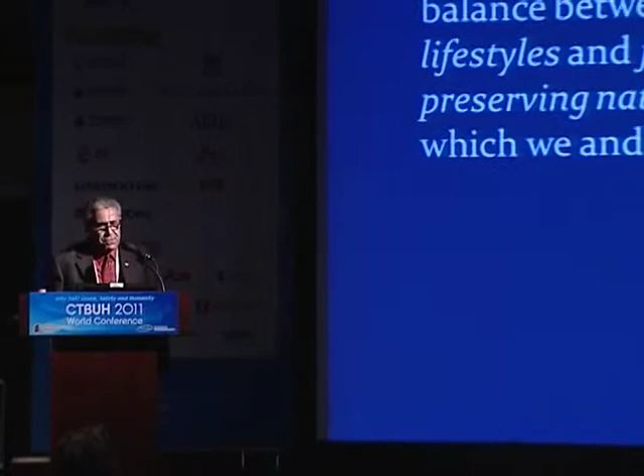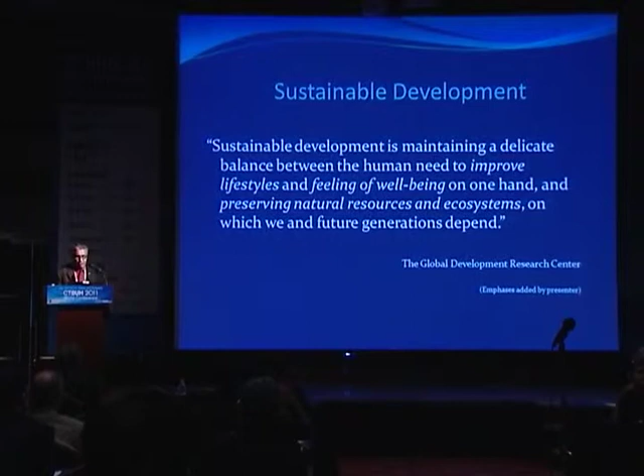We've all seen different definitions of what sustainability is. Just a couple of phrases I'd like to emphasize that you see in this particular version of what sustainable development is: it talks about improving lifestyle, so we're not talking about sacrificing quality of life, feeling of well-being, and it also talks about preserving our natural resources and ecosystems. Those are all terminologies we're very familiar with.

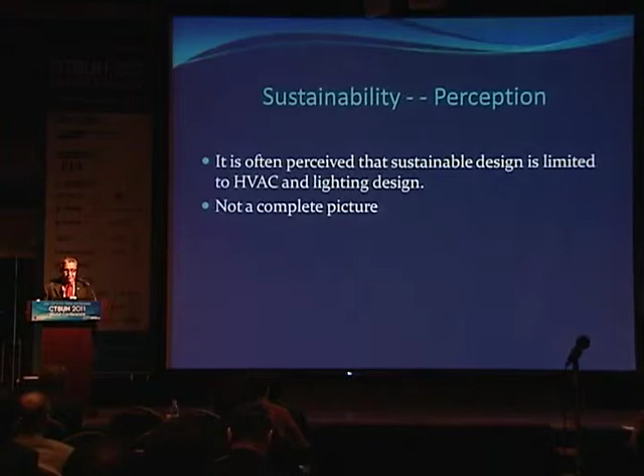One of the perceptions that exists among many people, certainly the public, is that when we talk about sustainable buildings, we're talking about efficient HVAC systems, maybe going a little further, including lighting and perhaps even the curtain wall. Obviously, this does not give a complete picture of what sustainable buildings are or what sustainability is all about.

As far as tall buildings are concerned, there are a number of features or characteristics that affect the sustainability impact of the building: architectural design, structural design, MEP design, construction, building operation, urban issues, and deconstruction. Some of these are more obvious than others. I'm not going to talk about MEP because we've all heard about that in many different presentations, and that's probably one aspect of sustainability that a lot of people can relate to more directly.

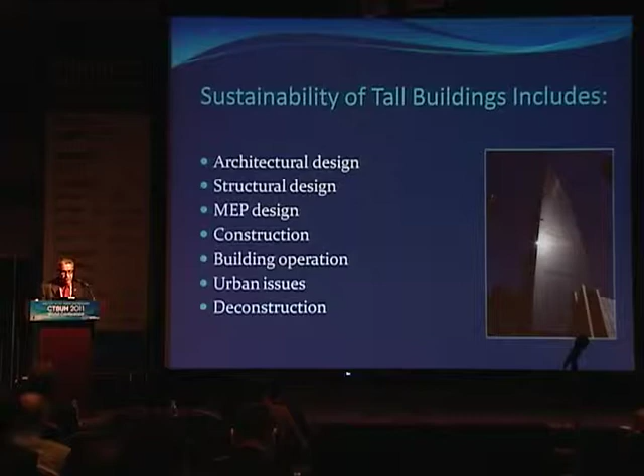I do want to point out building operation. We don't design and build buildings just for the sake of having designed and built a building. The purpose is for the building to go into operation and serve its purpose in a very economical and efficient way. So operation is very, very key in my view in terms of when we talk about sustainability. I'll talk about some of these other specific items a little bit more later on.

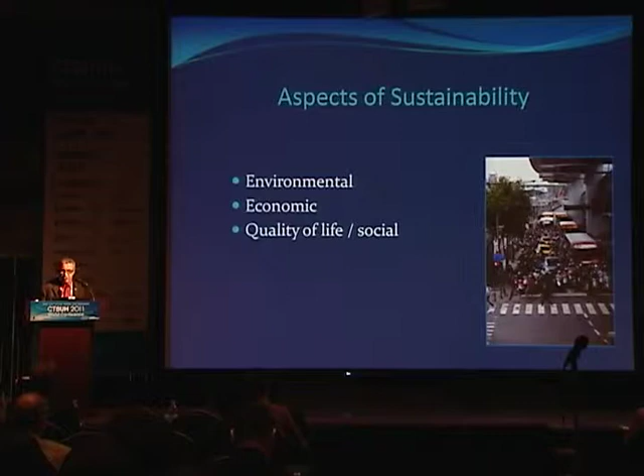Three aspects of sustainability that oftentimes you read in the literature: one is environmental aspect, one is economic, and also quality of life. The reason I mention these is because this would hopefully help us put things in a little bit better perspective when we talk about some of the other issues that will come up in a few moments.

How do we measure sustainability right now? Well, the most common methods we use are things like energy consumption. We find out how much energy a building consumes per square foot, per unit time, whatever that time period is, and we oftentimes compare that to other buildings, saying this building is more or less efficient than another. We also talk about material use, partly because of the limited resources we have, and also because of the embodied energy and carbon content. And of course, sometimes people go beyond that and also look at life cycle assessment, which is very appropriate in terms of looking at sustainability.

Those are all very good measures. They're very appropriate. If we were to evaluate the effectiveness of a design, we need to have some measuring sticks so that we can measure them. Those are all very appropriate, but perhaps not very complete. We do also have organizations in the US and other countries that help us, or whatever you want to call it, rank buildings in terms of their sustainability qualities.

They have certain criteria. I personally tend to not agree with some of their criteria, and I hope some of you don't either. This is one particular subject I can talk about a lot. But we do need measuring sticks so we can compare. On the other hand, I think the criteria needs to be more refined and appropriate. We've also seen some organizations significantly changing their criteria, which indicates that perhaps the criteria we were using before were not quite on track, and suddenly there's a big change.

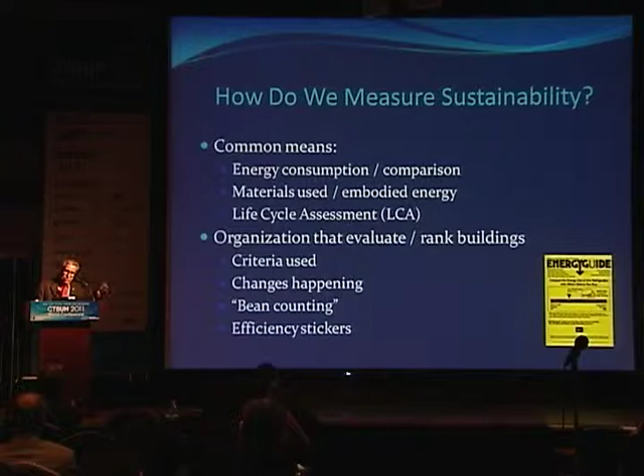There are also discussions in some countries about having, similar to what you see on appliances, energy guide stickers that say how effective a building is. Again, those measures may be accurate within a certain context, but they should not be viewed as an overall appropriate evaluation of a building.

Let me talk a little about the characteristics of tall buildings so we put things in better perspective. There is a high level of expertise and skill that goes into the development and design of tall buildings. Not everybody designs and builds tall buildings. You have to be highly skilled, highly knowledgeable, very experienced, and know what you're talking about. At this conference we've heard from many highly regarded professionals who've designed and built tall buildings, very skilled people. What that means is you get buildings that are very efficient, very well designed, and often apply the state-of-the-art in whatever field.

Tall buildings are also very safe, as opposed to what some people feel. Unfortunately, when there's an incident like 9/11, people start questioning the safety of these buildings. In fact, in my view, tall buildings are excellent shelters for certain situations. Imagine certain natural disasters that cannot be predicted, such as earthquakes, but with winds, typhoons, and tsunamis, tall buildings may serve as shelters. There may be water damage, but the buildings will certainly serve as very appropriate shelters.

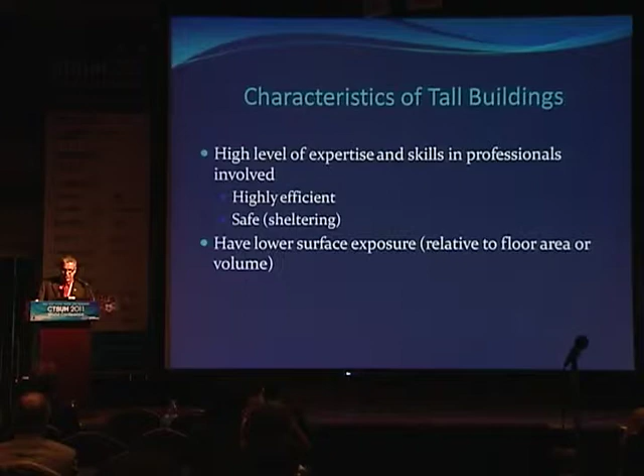Tall buildings also have lower surface exposure, whether you look at it in terms of surface-to-floor-area or volume, which means they have higher qualities in terms of energy efficiency, strictly speaking.

Other characteristics of tall buildings relate to urban issues. Tall buildings are very effective in terms of using land and developing high-density populations. They are tremendously helpful for more efficient infrastructure. Imagine, for example, if a building has 500 residential units, and those units were instead built in the suburbs - it takes up a lot of land and requires significant infrastructure to deliver utilities like water, electricity, gas, and sewage. That significant requirement will certainly affect the sustainability of the entire community.

That's why I said tall buildings have sustainability impacts that are very important. Imagine all those people who would otherwise live in the suburbs, commuting back and forth to work every day.

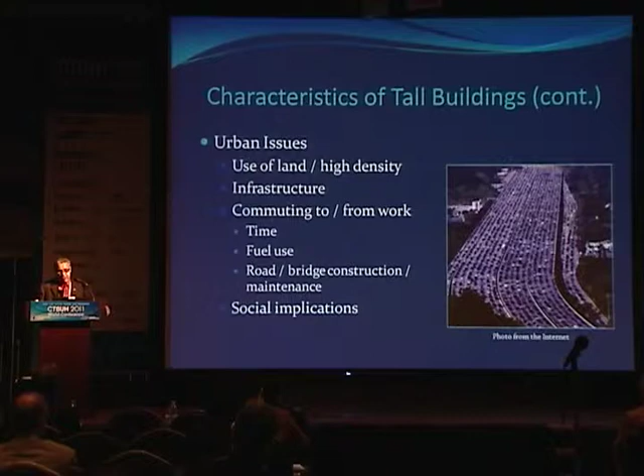They spend a lot of time on roads. There's a lot of fuel consumption. There's a lot of erosion of roads and bridges that need to be replaced or maintained. Again, those are all impacts on sustainability that tall buildings could address.

And there are, of course, some social implications. I'll come back to this a little bit later on. Other characteristics of tall buildings, again, some of these could be viewed as positive or not so positive, but I want to share these points so we can come back and draw some conclusions.

Certainly, tall buildings consume more material to build, mostly structural material. There is a premium for height. We all know that, and until we find a situation where we can stop wind and prevent earthquakes, we're going to have to pay a premium for design of tall buildings in terms of structure and material use.

Also, they have a high ratio of translucent to wall area. That's part of their architecture. It's very appropriate in my view. But that means there will be more daylighting, beautiful, spectacular views, but there also may tend to be more energy, heat gain and heat loss, which may be the other side of the equation.

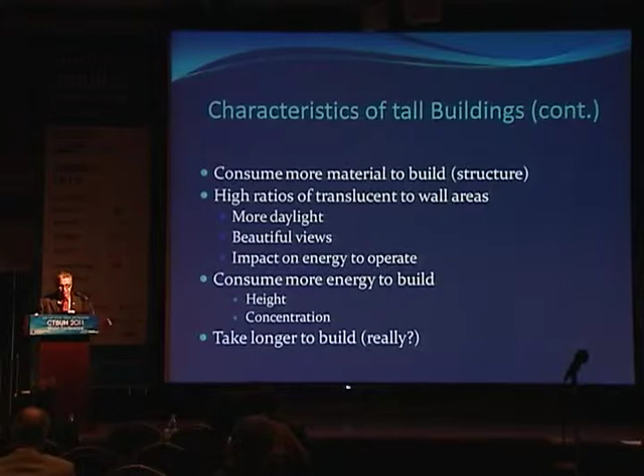They consume more energy to build because of the height, because of the concentration of delivering material to high heights. To build buildings that are spread on the ground is one thing, but to concentrate all of that in one small area requires a different level of energy. And of course, they take longer to build because of the reasons that I just mentioned.

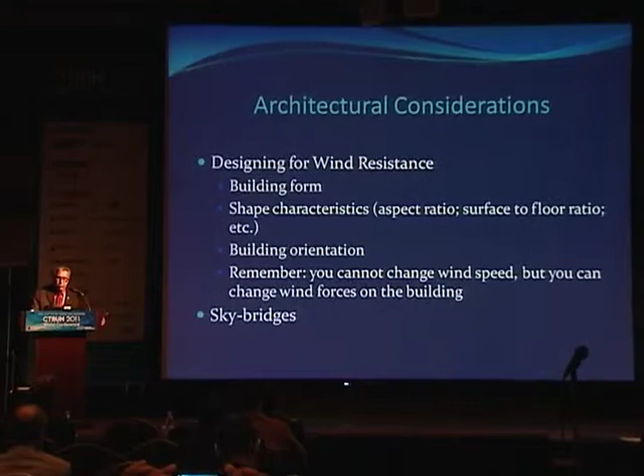Now, let's talk a little bit about some of the considerations that would lead to the overall sustainability impact of tall buildings.

Designing for wind is one of the key issues, of course, because lateral load resisting systems are a very prominent part of tall buildings. Building form, we've heard these things many times at this conference and in other venues. Form and shape, and characteristics such as aspect ratio and surface-to-floor ratio, will certainly affect the impact of wind on the structure and the loads it has to resist.

Building orientation, siting the building on the site itself. You could sometimes adjust the siting, the angle of the building, the orientation of the building, and significantly reduce the wind forces that the building will experience.

The bottom line is that you and I cannot change the wind speed, that's nature. But we can significantly reduce the forces a building will experience, and therefore reduce the amount of structure, the amount of load that it uses. Sometimes that less structure means more available space in the building, which also has an impact on the sustainability effects of the building.

Sky bridges, again, could be very effective in reducing the areas taken up by egress and so forth.

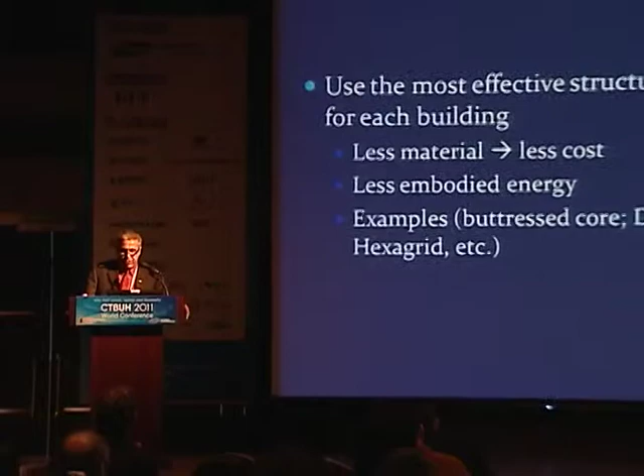Structural considerations: use of the most effective structural systems means less material, less building, less weight, therefore even less structure, less embodied energy. There are a number of structural types used these days that make design of tall buildings a lot more effective. Fazlur Khan was a genius. He developed those wonderful structural systems that many people have used for quite a long time in designing tall buildings.

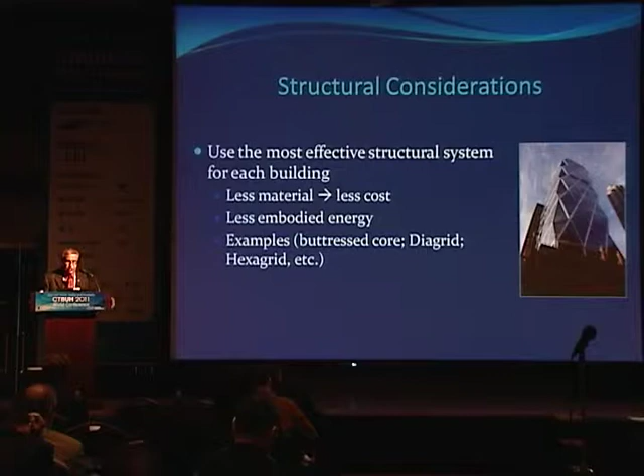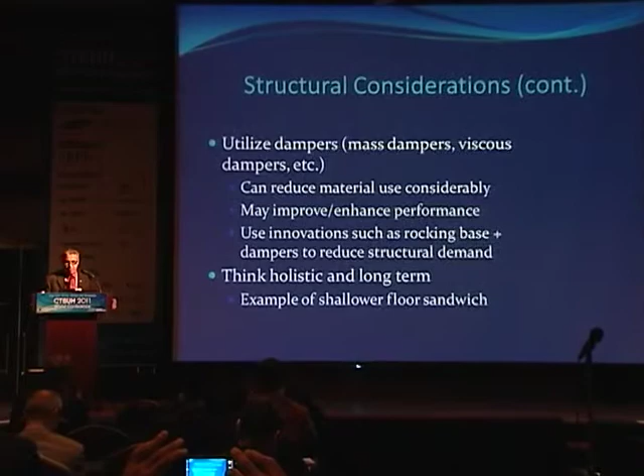But as we heard this morning, things have changed, and things may need to be done a little differently. Using dampers - many engineers have been resistant to using dampers in the past, but by using mass dampers and viscous dampers, you can considerably reduce the amount of structure and material used, and embodied energy, while also enhancing the performance of the building.

Use of other innovations we've heard throughout this conference, such as rocking bases and dampers, to reduce the forces on the structure. The bottom line, the key, is that we want to look at the sustainability impact of building tall buildings in a very holistic way.

Let me give you a very quick example. Imagine you have a tall building. The numbers I'm about to give you are not very realistic, but they may make the math a little simpler to follow. Imagine a building with a footprint that is a square, 250 feet in each direction, so that's a total perimeter of 1,000 feet.

If you make your floor sandwich 3 inches shallower, you may use more material, you may not have the most effective structural floor system, but in a 60-story building you save 180 inches, which is about 15 feet. Imagine that's a 1,000 foot perimeter times 15 feet—that's 15,000 square feet of less curtain wall alone. Multiply that by whatever the cost is.

There's significant cost savings in the curtain wall alone. In addition, you have less height, therefore less wind load, less forces, less structure needed, less space to heat and cool during the life of the structure—this will have a significant effect on the life cycle performance of the building. So there are some simple things that can be done that may seem inappropriate at one point, but certainly will have a longer impact.

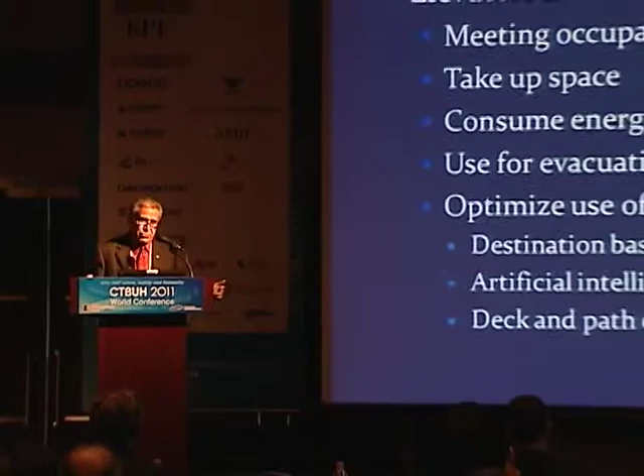Elevator systems, as we all know, are very, very key in design of tall buildings. Obviously, you need to have enough of them so that the occupants are comfortable and meet their expectations. You don't want to spend $15 million on a penthouse and then have to wait 10 minutes for an elevator to come. So there needs to be some rationale there.

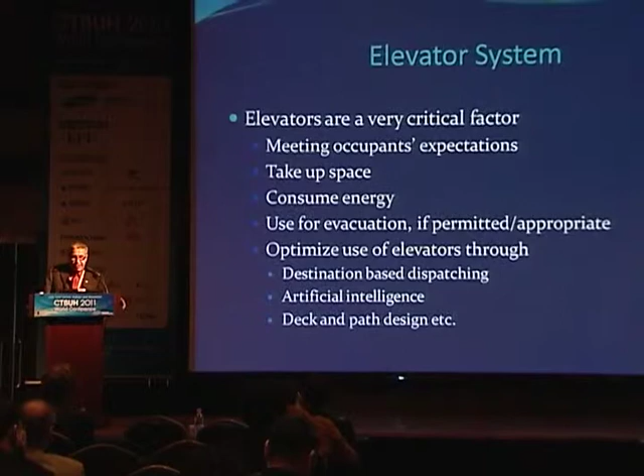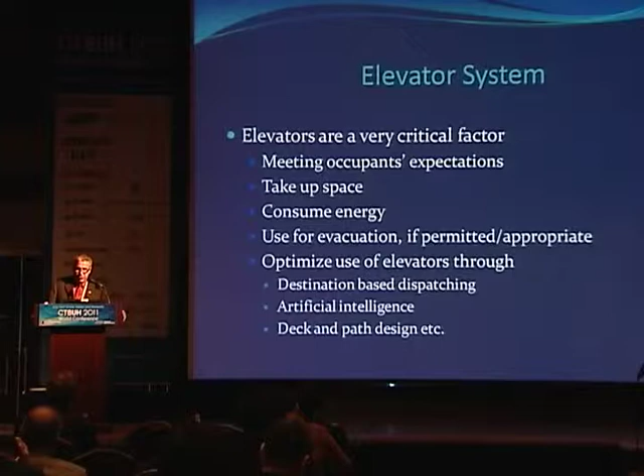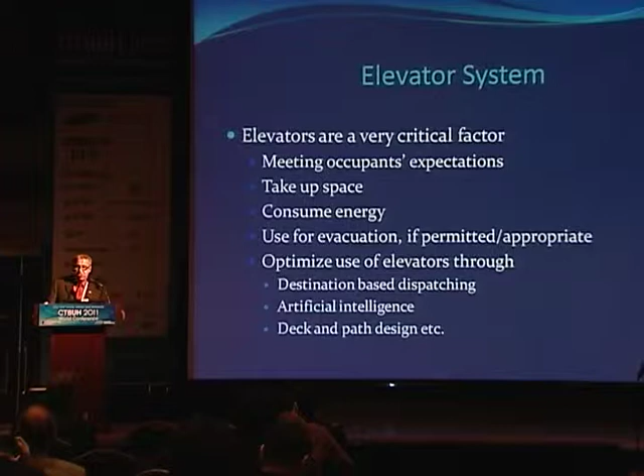But elevators do take up space, and they use energy. Some of the things we can do is use them for other purposes, like evacuation if permitted by code and if appropriate, which would potentially reduce the need for other means of egress. Optimize use of elevators through some of the technologies available these days. If you can take away 1 square foot out of an elevator shaft and make that usable space, that 1 square foot can generate considerable revenues throughout the life of the building, making it actually more sustainable, because with the same volume of building and the same mechanical systems, you end up having more usable space.

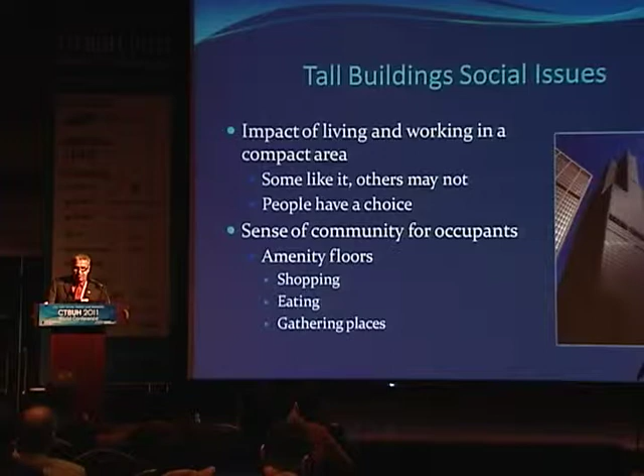Let me skip this one since time is short. I do want to talk a little bit about deconstruction and its relationship to sustainability.

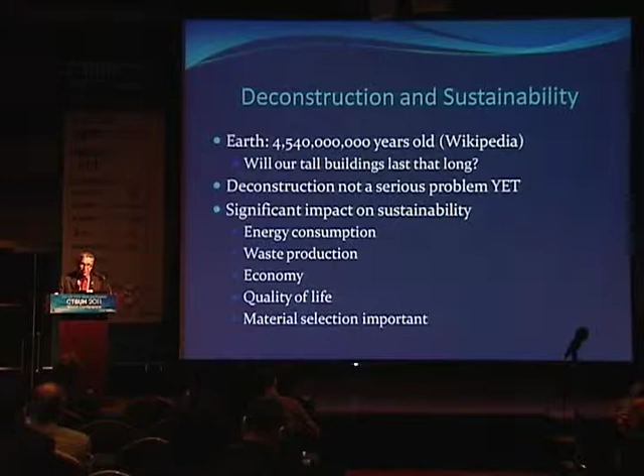The Earth, according to Wikipedia, and we all know how credible that is, is about 4.54 billion years old. I don't know how accurate that number is, but it is very, very old. It's been around for a very long time, and we hope it will be around for a very long time too. But do our buildings also last that long, or do we want them to?

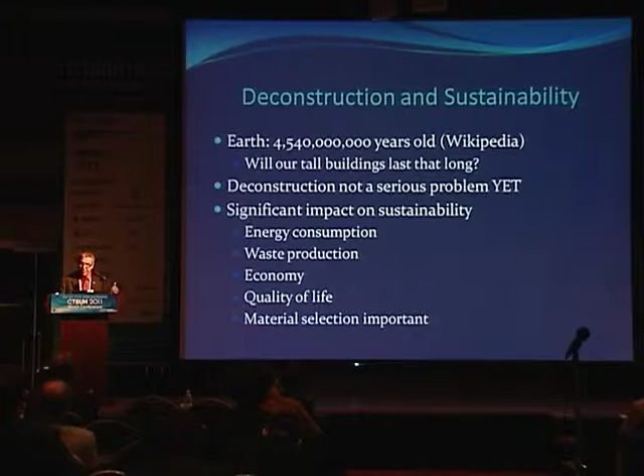Deconstruction of a building can have significant impact in terms of energy consumption, waste produced, economy, and quality of life. Material selection could possibly make a big difference if it's taken into consideration during design time. If we don't do this, at some point we'll have to start dealing with it, and we'll find out that our buildings may have been more so-called sustainable during their life, but at the end, they're quite the opposite.

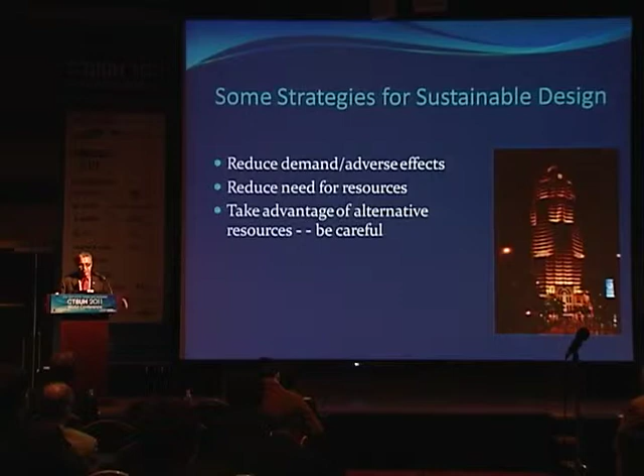So, to summarize some of the strategies you want to use for more sustainable buildings: one is obviously to reduce the demand for resources and reduce the amount of adverse effects. For example, with lighting, you want to provide the same amount of lighting that is necessary, but through other means, like daylighting, so that we need to use less energy, more efficient fixtures, and alternative sources of energy.

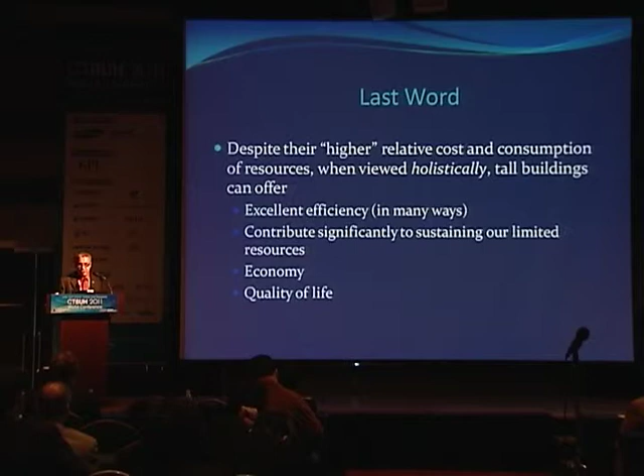Let me just do this last word. In my view, despite their so-called higher relative costs of construction and consumption of energy, if you look at tall buildings in a holistic way, they have a very positive sustainability impact. They are very efficient, they contribute significantly to sustainability of our limited resources, they're very economical, and they certainly improve the quality of life. Thank you very much.